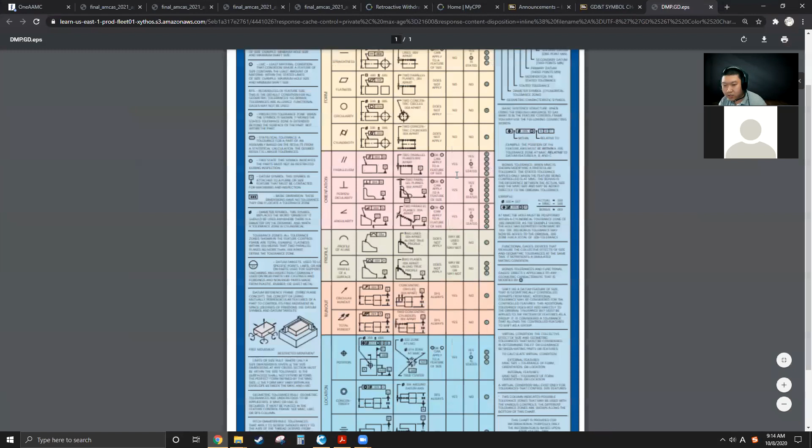All right, so I posted something under course documents last week called GD&T symbol chart, the geometric dimensioning and tolerancing symbol chart. It includes pretty much every GD&T symbol you're gonna use on your first project. Remember, I posted the project requirements two weeks ago. The project requires you to use at least 2 customized datums and at least 4 different types of GD&T symbols.

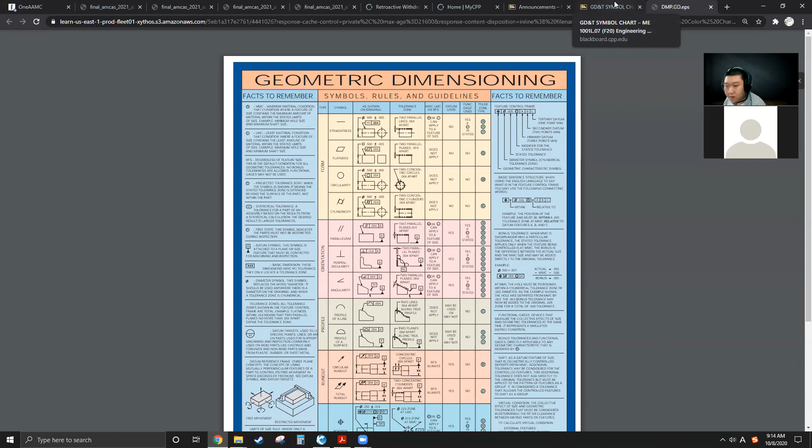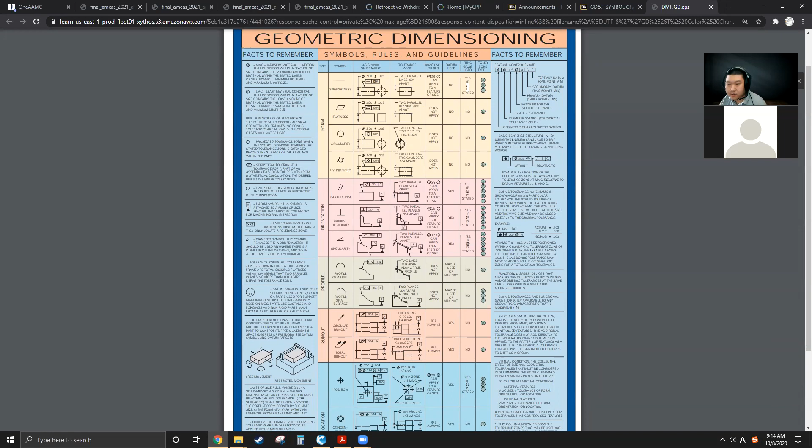So here you're looking at the GD&T symbols that you're going to use on your first project. You're going to pick at least 4 different ones and use them in the proper place. So let's go over this chart. Some of you might have read it, some might not. The first one is called straightness. The symbol is just a line. So straightness is shown as a line.

So you see right here, this box with the leader, this is your GD&T symbol and your tolerance value. A straightness of 4 thousandths of an inch pretty much means this edge, on this cylindrical object, kind of like a pillar, is going to have a straightness within 4 thousandths of an inch. Well, this is kind of weird to explain, because I never see straightness in any application.

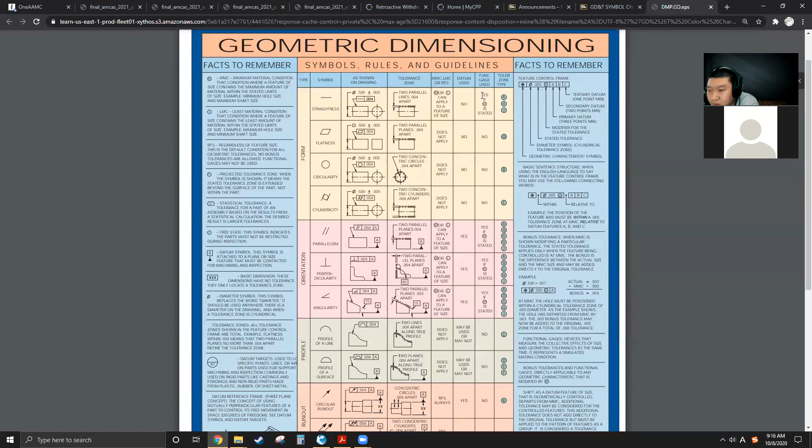So let's just read it together. So datum used, no, because you don't see any datum attached after this value. And the functional gauge used, yes, if M is stated. So what's M? M right here is maximum material condition. That condition where a feature of size contains the maximum amount of material within stated limits of size. Example, minimum hole size and the maximum shaft size. Yep. So if this one is stated as necessary for design, then it's yes.

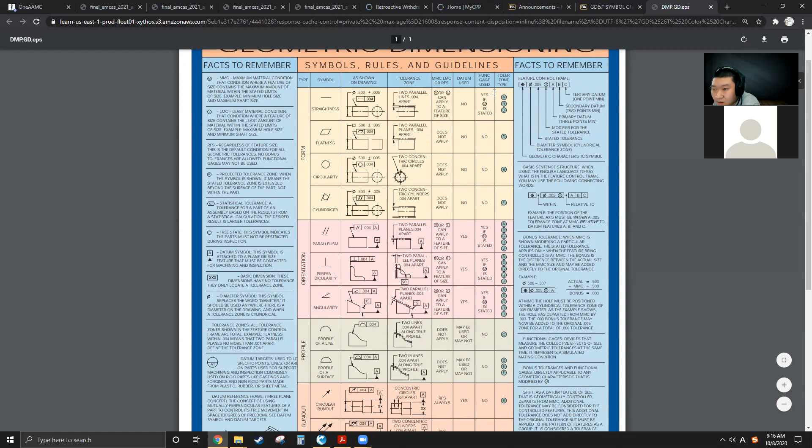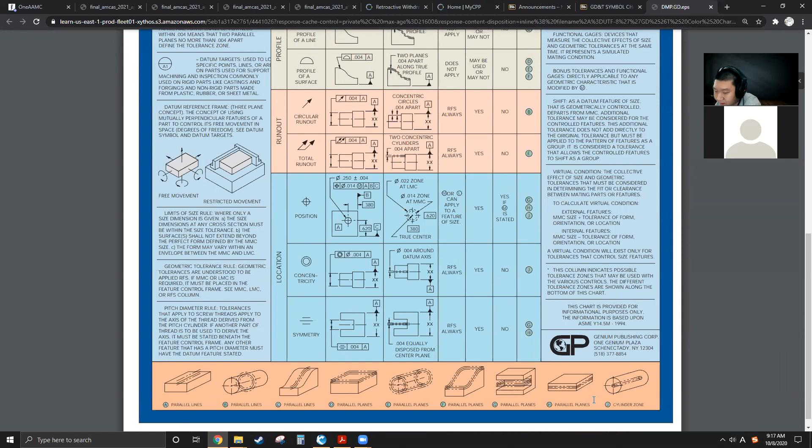And tolerance zone type, A, H, J. Where is A, H, J? Okay, A right here. All right, parallel lines. Yeah, definitely. Straightness dealing with line, right? And H, parallel planes. And a plane can have straightness as well because it's a 2D plane; when you look at it sideways, it's going to look like a line. And J, last one, cylinder zone. That's kind of confusing.

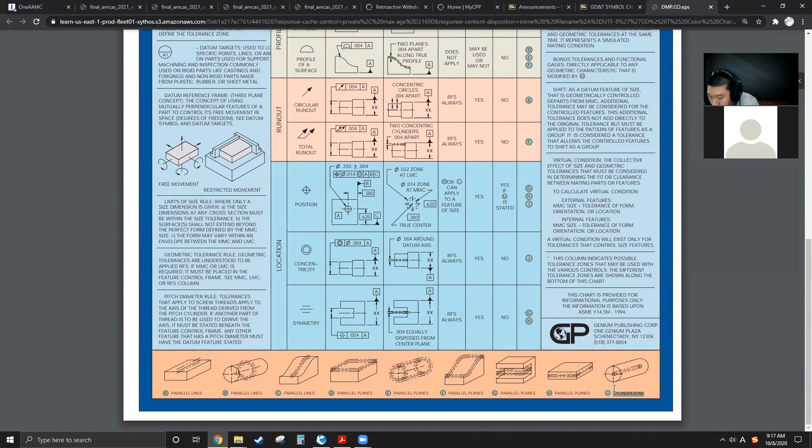All right, for cylinder zone, I don't know. Maybe it's just talking about the center axis, like the center line of the cylinder, or is it talking about a little bore? I don't know. It's kind of weird because straightness can be covered by a lot of different features. Like, for example, if you have total runout or total indicated runout, straightness can definitely be covered by this feature. So that's why I never see straightness in any industrial application.

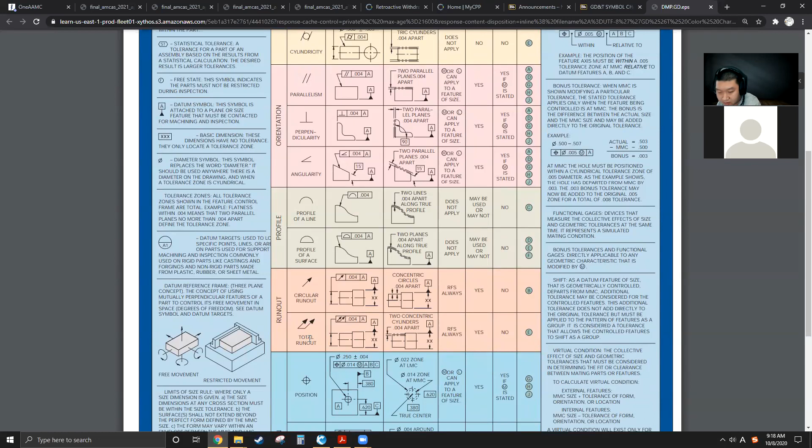Normally, if you have a cylindrical subject like this, and it has a bore or something to correlate with, or another bigger round cylinder, such as this one, you use total indicated runout, so you make sure that two edges of the outside surface of the cylinder are perfectly straight. Because if it's not straight, it will fail the total indicated runout inspection at QC. So I would say straightness probably won't be a very good example. But anyway, it's here. It has a purpose to be here, right?

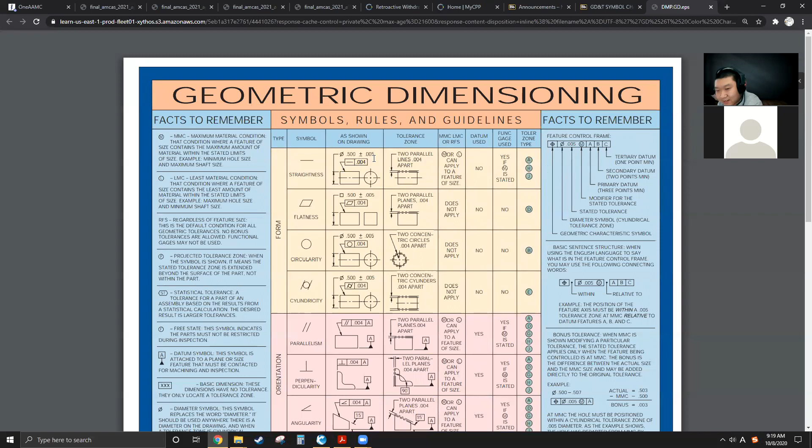And it doesn't even reference any datum. So if it doesn't reference any datum, that means this is pretty much just a reference by itself. You know what I'm talking about? Referencing a datum is kind of like a dimension. A dimension references one edge to another edge. So a dimension has two references. It's kind of like a line: you must have two dots, and connecting two dots gives you a line. But this one doesn't even reference anything. So if you want to use it, do some research to see what kind of application you'd use this in. But most likely this is really, really weak.

And flatness, no reference datum, but this one's kind of critical. I've seen this one a lot. For example, if you design a table or a bench, and the bench is going to take some load or some mechanism is placed on the top surface, your flatness would be very important. Because without flatness, the stuff you put on there can be imbalanced or rattling. That kind of stuff can damage your entire system, especially for natural frequency purposes.

So flatness and this value, 4 thousandths of an inch, is actually the industrial standard. If you work with an electric motor and your motor is going to be sitting on top of a plate or an adapter or anything, the top surface of the plate or adapter must have a flatness of 4 thousandths of an inch or even smaller. I have seen 2 thousandths of an inch, and that's really, really hard to machine and costs a lot. So flatness is definitely a pretty strong one, and people talk about it a lot.

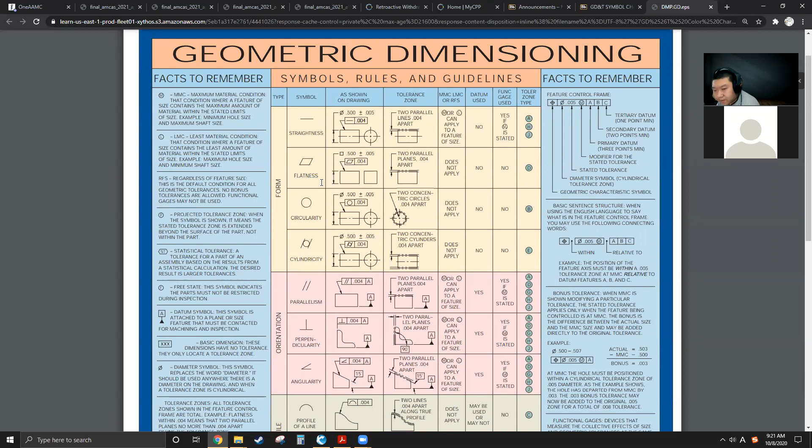Circularity and cylindricity, they're very similar. And also total indicated runout and concentricity; these four come from the same family. They're siblings. So circularity, you can see this one has a diameter of half an inch, plus minus 5 thou, and the circularity has a 4 thousandths tolerance. So that means two concentric circles cannot be more than 4 thousandths of an inch apart. Very straightforward. With two concentric circles, you want them as concentric as they can be, right? Because if one circle is off place, you'll be in very big trouble.

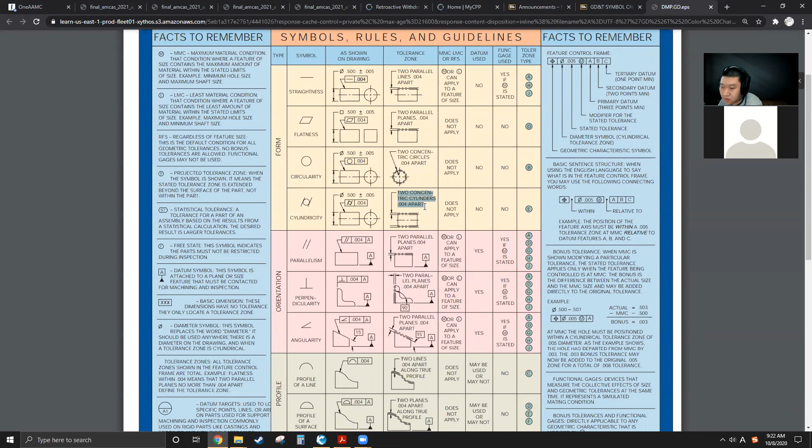And cylindricity, pretty much the same thing. I believe one is talking about two circles, and this one is talking about two cylinders. So very similar. Any questions about these top four? Let's go section by section. I want to go over one section, and if you have a question, let's talk about it more. And if you don't have a question, let's move on to the next section.

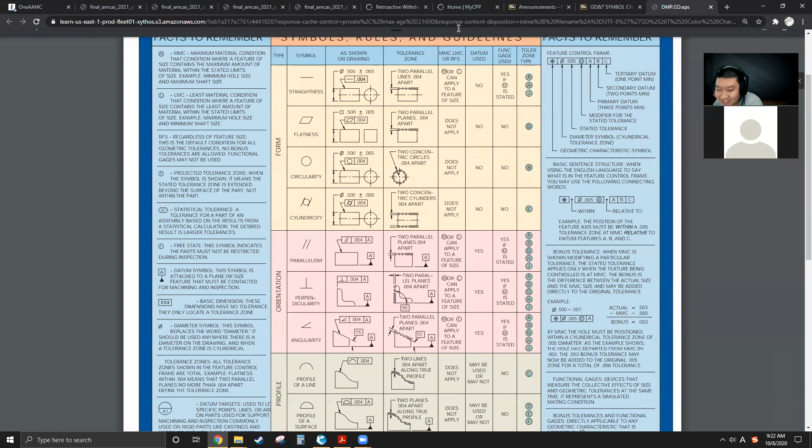Nothing? You guys still there? Yep, still here. All right.

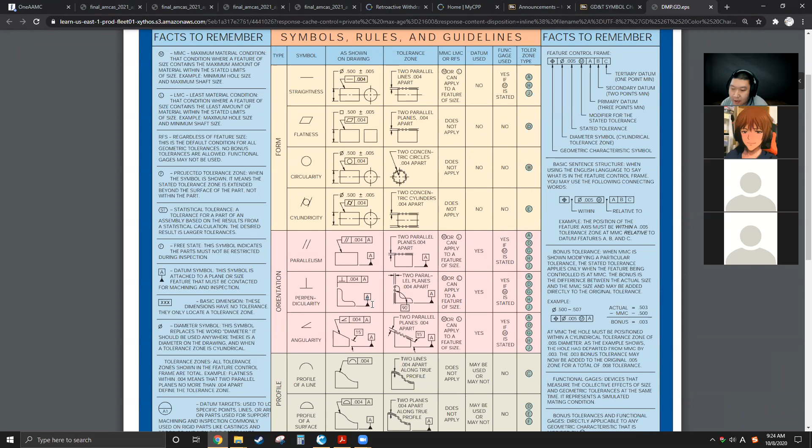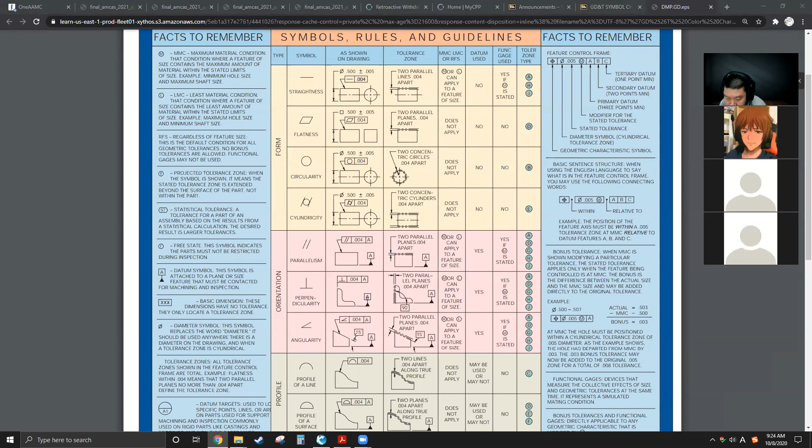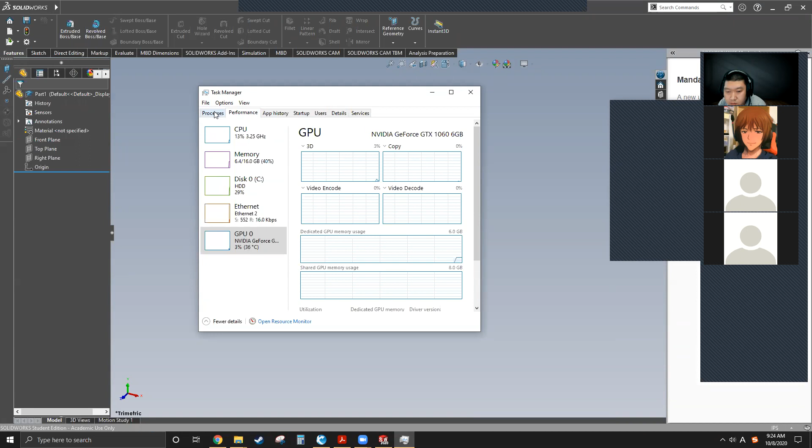Hold on one second. Let me bring up SolidWorks so I can do a quick part for you. Oh, that's fine. Why is it so slow?

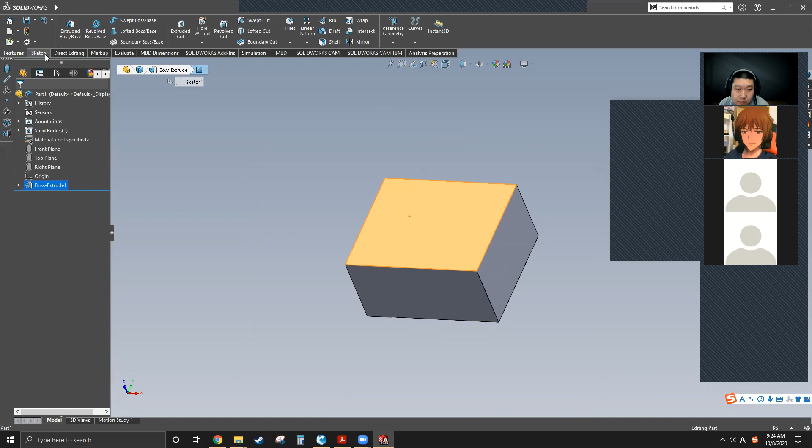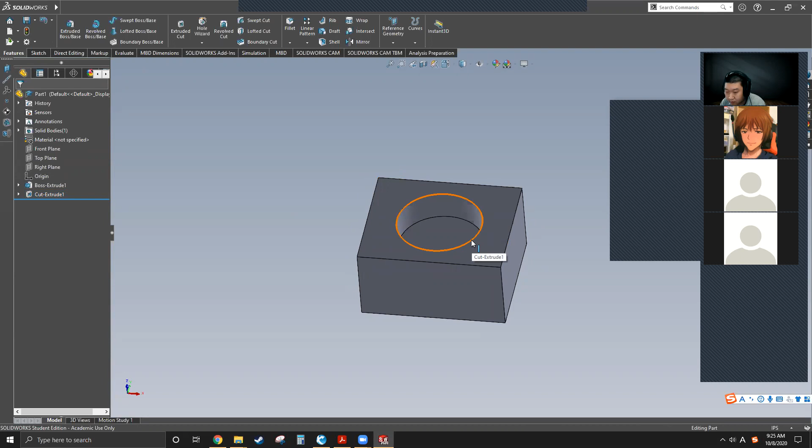All right, you have a block. For example, you want to mill two circles or two counterbores, and that's your first circle. Let's make a counterbore. Okay, so you have a counterbore right here, and let's do another circle. And you want them to be concentric, right? So pretty much you have a bore and a counterbore. These two circles are concentric, right?

And how can you make sure these two circles are as concentric as you're asked? Pretty much you can't. You tell the machinist, machine these two circles with origin at the same point. Machinists can understand it, but the machine doesn't. When you get into the manufacturing lab and start using the lathe or milling machine, they can't identify the origin of the circle. That's why you need to tell them how much tolerance you're going to take.

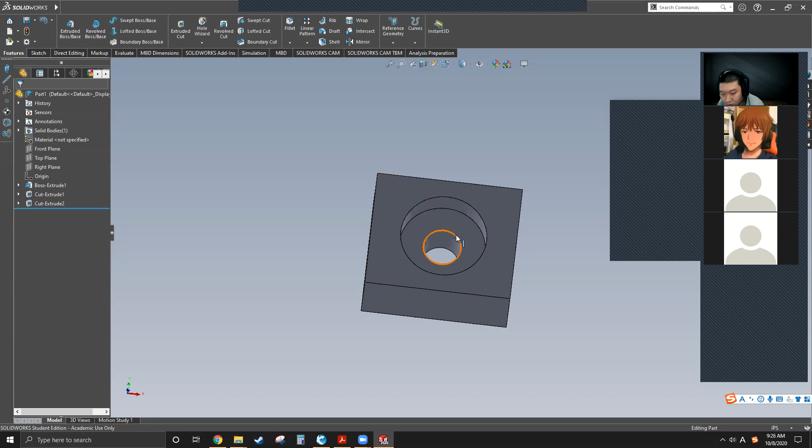Tolerance means kind of the risk, how much you're okay with for your part. You want this to be perfectly concentric? No way. Unless you're paying a lot of money for some high precision company using leading edge tools, maybe there's a possibility, but most likely it's not going to happen.

So you're going to set a tolerance saying, these two circles, if they're not concentric but the distance of the two origins is less than 4 thousandths of an inch, that would be acceptable. So the machinist will say, okay, that's doable, my tool is not that precise, but 4 thousandths of an inch should be enough. You know what I'm saying? Yeah, I get it. So that's when you use circularity.

Same with cylindricity. I believe this is just like a bushing. So two cylinders, right? One cylinder is the bushing, and another is a hollow cylindrical shape within your bore. So instead of two circles, circularity only controls this highlighted circle and this circle, and cylindricity controls this surface and this surface.

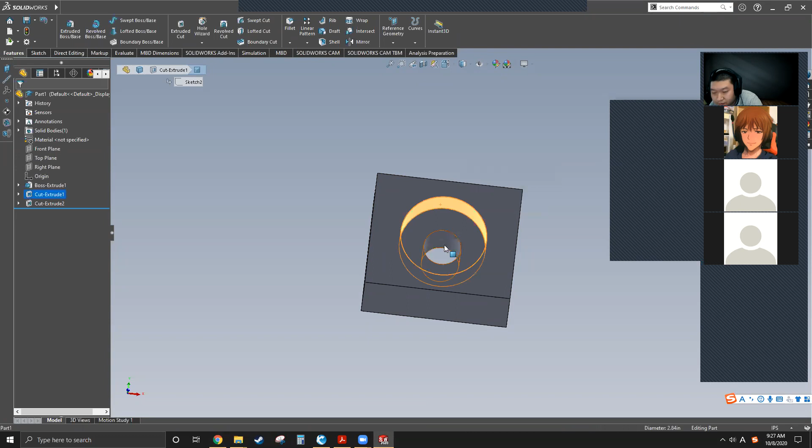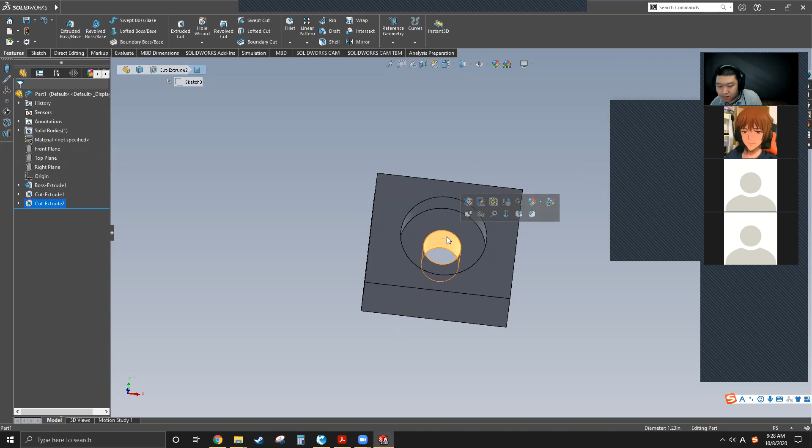So if you use circularity, they're just going to measure this circle and where the origin is, and compare with this circle's origin. When you use cylindricity, they're going to measure all the way through the surfaces, any spot on the surfaces, and compare with any spot on this surface. So the difference is like point to point versus surface to surface, kind of like 1D versus 2D.

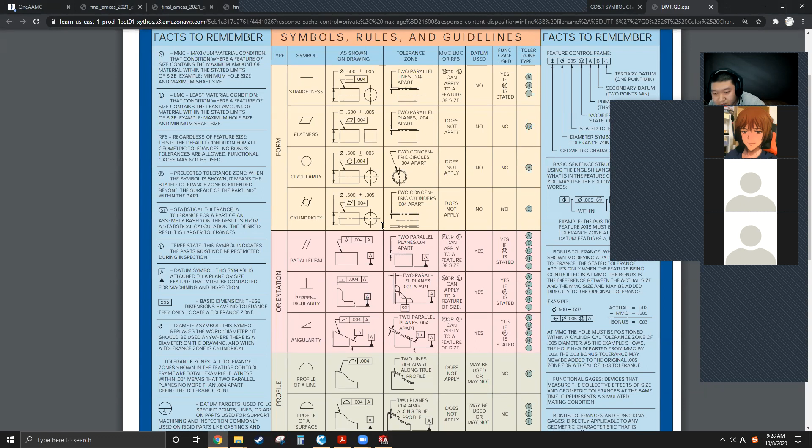All right, I'll move on. Oh, no problem. Anytime, man. You just need to ask.

Parallelism. Right now the datum starts kicking in. You can see it has a little box right next to the value. This is datum A, and it shows on this diagram with a little leader to this edge. That means datum A is this edge. Before we get into it, let me show you the definition of datum. I really can't remember the textbook definition.

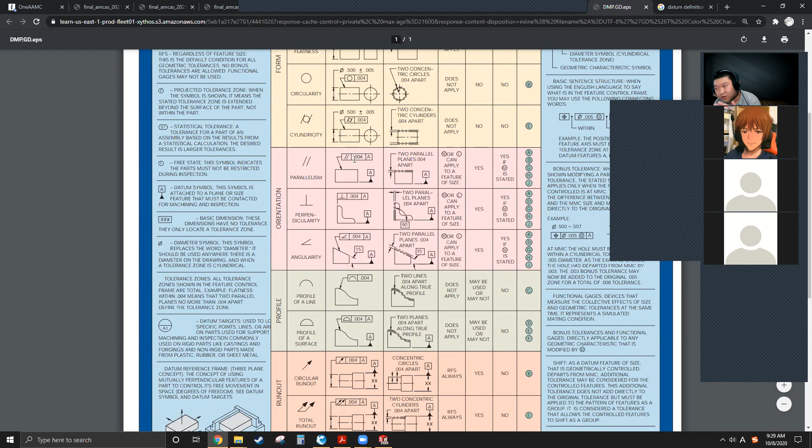A datum is a plane, a straight line or a point used as reference when processing a material or measuring the dimension of a target. Remember this definition, or remember it in your own language. So the datum in this case can be an edge. For this block, the datum is the bottom edge, and you want your top edge to be parallel with the bottom edge, and the difference for the two parallel lines cannot be more than 4 thousandths of an inch.

I hope that explains it. Okay, here it says it better. Two parallel planes, 4 thousandths of an inch apart. So your line cannot go over that plane. You see this very often, same as circularity and flatness.

Yes, yes. So I will show you later. Well, no, it won't automatically show up. You will need to manually input the symbol type and the tolerance value for your dimension.

And perpendicular, well, whatever, perpendicular. Perpendicular, same thing as parallelism, just this one is 90 degrees apart. So these two are very similar, but do different jobs. Angularity, I never used it. I never see anybody use it.

Anybody who still recalls what we did 2 weeks ago, making the weird pyramid with a lot of angles within that model, right? Kind of like a little pyramid, that kind of stuff, weird shape. But we never even defined any angle, right? Why? Because the model is fully defined by all the distances from this edge to that edge, from this point to that point, stuff like that. We don't need to define any angle. And if you forgot, just go back to YouTube to watch the lecture video again.

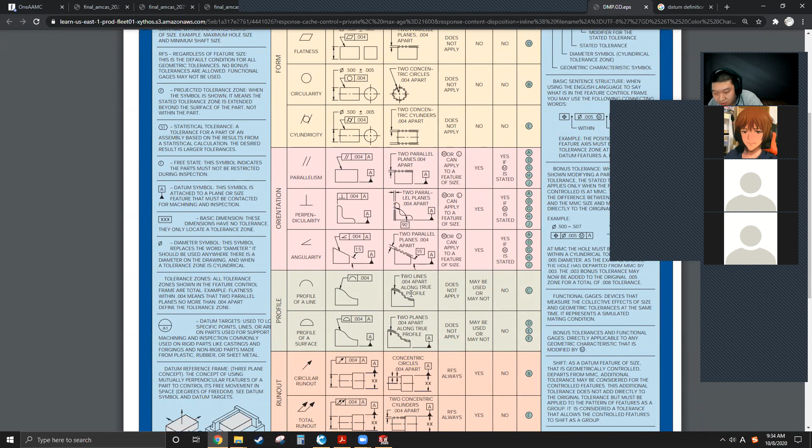So profile of a line and profile of a surface. I normally don't see this, but let's read it. Two lines, this amount apart, along the true profile. So kind of like a curvy straightness, or is it like a curvy parallelism, right? So the profile is regulated by two boundaries, the first boundary and second boundary, which are the dashed lines right here, and they cannot be more than 4 thousandths apart.

And this one for the surface, pretty much profile of a line versus profile of a surface is very similar to circularity versus cylindricity. One is talking about a line, one is talking about the entire surface. And its own characteristic is very similar to parallelism.

Okay, circular runout and total runout. So total runout pretty much covers circular runout. So this is kind of like parent and child. So if your company doesn't want to do the entire tracking band, or wants to reduce the cost for manufacturing and QC, they probably do circular runout. But this one only regulates, I believe, one side, right? Concentric circle, this apart, and this one is two concentric cylinders, this apart. Yep, so this is going to control one side, and this controls both sides.

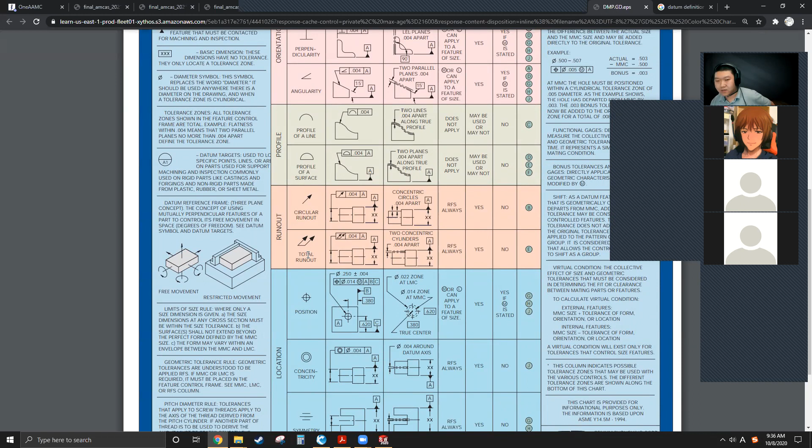And total runout, very powerful and very expensive. This is very strictly used in any rotating components. So anything that's going to rotate definitely will have a total indicated runout inside its bore or outside its shaft or on both. So if you're making your project a rotating component, such as a gear train, anything that rotates, you can't miss this one.

Any questions about the second part before we move to the final part?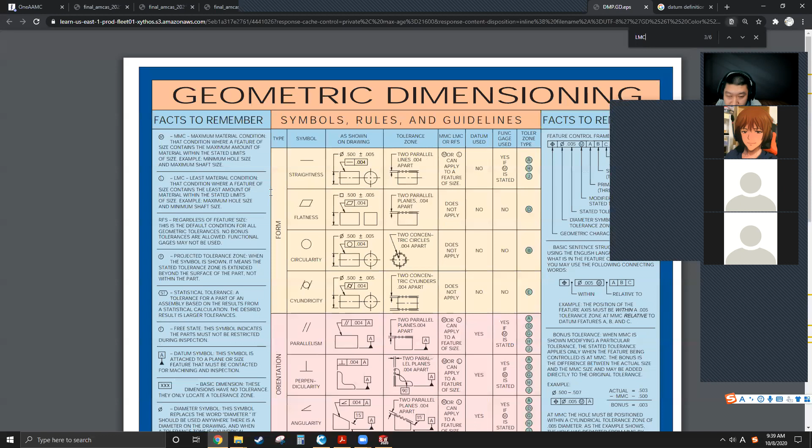Okay, limit of size rule, only a size dimension, beyond the envelope. So MMC is maximum material condition. Okay, least material condition. Okay, so one is maximum, one is least. All right, where are we? Okay, right here.

So this one is this big at the least material condition, and 14 thousandths of an inch zone at maximum material condition, and true center. Wow, this one pretty much explains nothing. Okay, 4 thousandths, 8 thousandths. Okay, I get it. So 14 thousandths of an inch, right? And this hole is a quarter-inch hole that has a plus minus 4 thou.

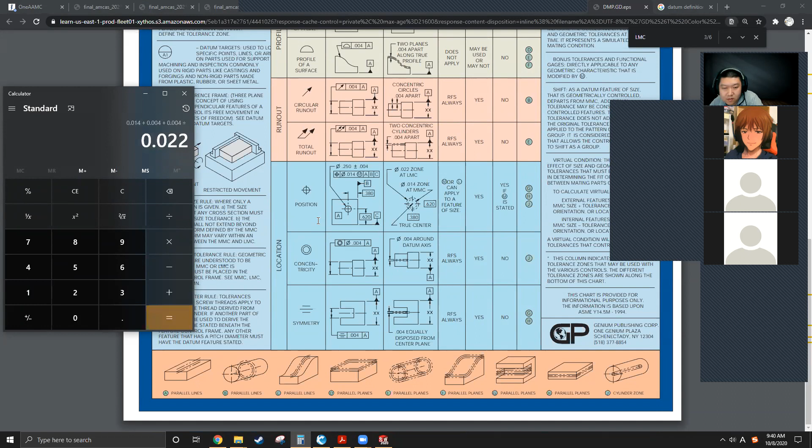So the hole's location can be off by 14 thou plus 4 thou plus 4 thou. So that's 22 thousandths for the least material condition. How to say that? So is this much off? Anyway, so pretty much this 0.62 from datum C can go above this much or less than this much.

Let's get a notepad. Yeah. So this 0.620 dimension, you can see from the center of the hole to the reference C, can go plus or minus this much. And that's your least material condition. Okay. And your max material condition is pretty much the same dimension and plus or minus this one, because you can't go smaller than this. Is this making sense? And the same rule applies to this 0.38.

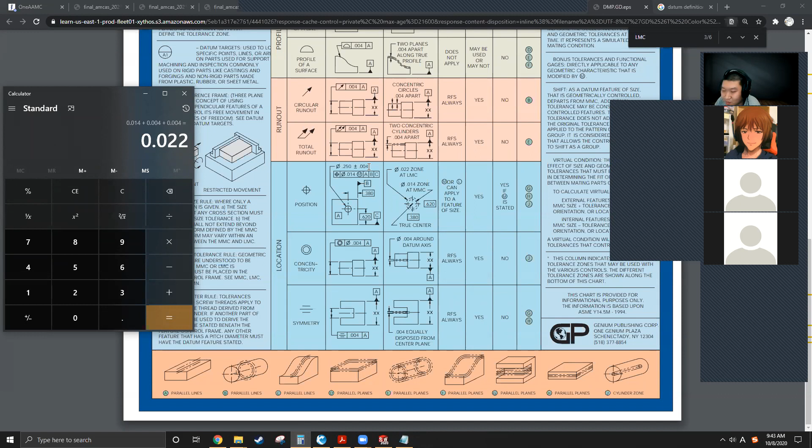Okay, so this number is added up from your tolerance value plus the hole's tolerance twice, because your hole has a tolerance and this dimension also has a tolerance. This is sort of making sense. Yeah, it's kind of a weird way to express it.

Yeah, after you get to your manufacturing lab, when you start milling holes or tapping holes, you'll understand that really easily, because the machine is sitting right there, and how you adjust the machine, what kind of math you're going to do, and input the value to locate the die. Yeah, they call it milling the die, or something like that, or the tap, and then you'll fully understand it. But for now, just know this one is really necessary for fastener hole stuff.

Concentricity. This one is very similar to runout, but is less strict, because this one is just talking about the datum axis and the outer surface, OD. Yeah, talking about the OD and the center datum. So you see, this one has a very similar diagram as the parallelism. Unlike this one, which is really strict about its outside surfaces. See?

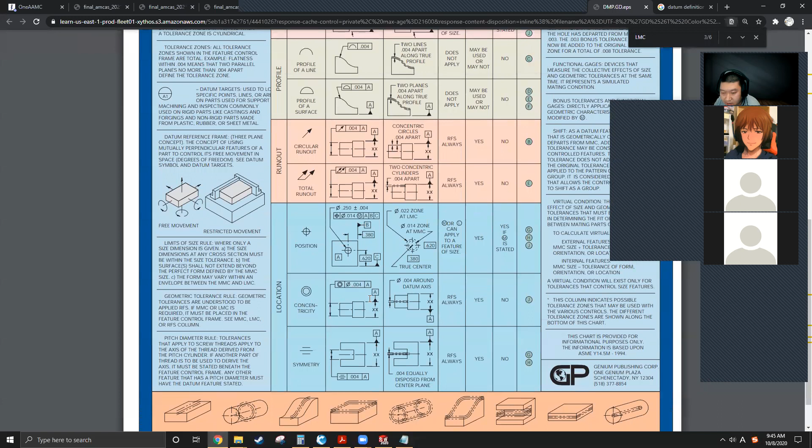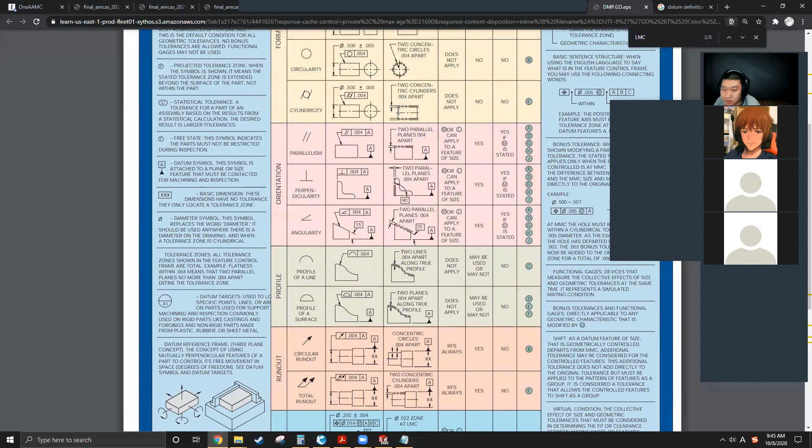So I'll say concentricity pretty much has the same power as cylindricity, but deals with one datum. This one doesn't have a datum, right? Yeah, this one doesn't have a datum. This one's controlling all the outside, like two surfaces, but this one is controlling one surface with the datum. And the datum you can set as the center axis, or you can set something else.

And symmetry, never seen it. I don't even know why it exists. Maybe some industry uses this a lot. I don't know. Because normally it's just easier to identify all parts, even though it's perfectly symmetric. Like your part is perfectly symmetric, but it's just easier to define the whole thing. And if you put symmetry right here, it might confuse somebody.

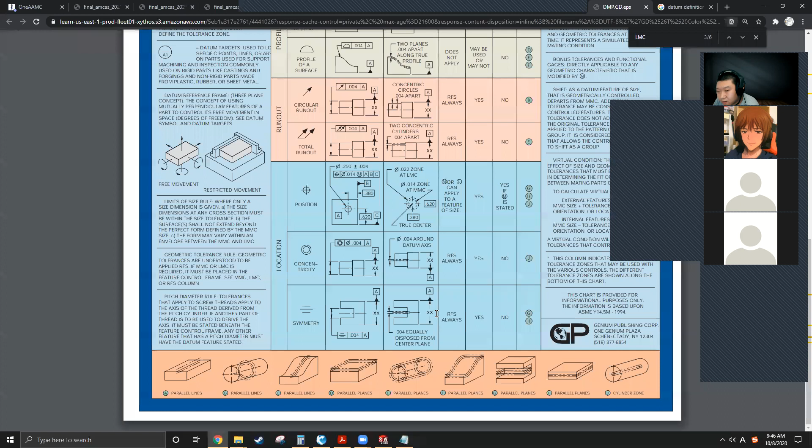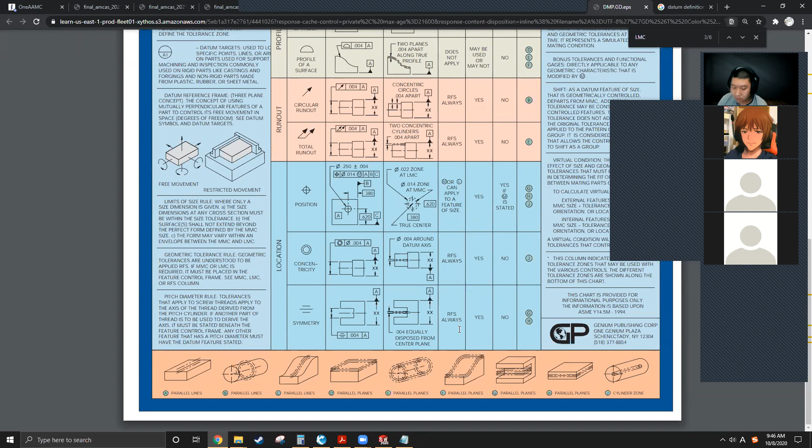So I'll say this one is similar to straightness. If you want to use it, you've got to do some research. But for all kinds of drawings that I have seen, I've never seen this. Okay. Any questions? No, nothing? Okay. Let's talk about what you guys care about the most, this project, right?

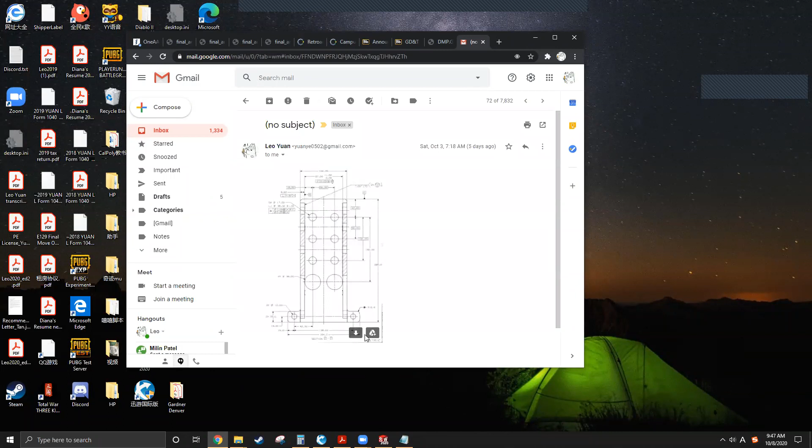All right, here we go. All right, everyone can see this one okay? Yes. Hello? Can you not hear us? Just Jacob alone. This is about your first project, guys. Yeah, I can't hear you. What's going on? Did I mute something? Yeah, I can't hear you guys. Can you hear me? So weird. Can you try to speak something again? Hello, testing. Can you hear me? Yeah, I can hear you guys. Okay, sorry, so dumb. My headphone has a controller by itself, and it has so many different modes. I turned off one of the modes, and it just became entirely muted. Okay, I feel much better now.

Yeah, so look at this drawing. This is my expectation for project 1. You don't have to make it as complicated as this one, but the way it's dimensioned, the dimensions you use, the datums it labeled, and the GD&T symbols are my expectation. Don't worry about the welding. This is the welding symbol. It's just there because I had to take the entire shot, so ignore this.

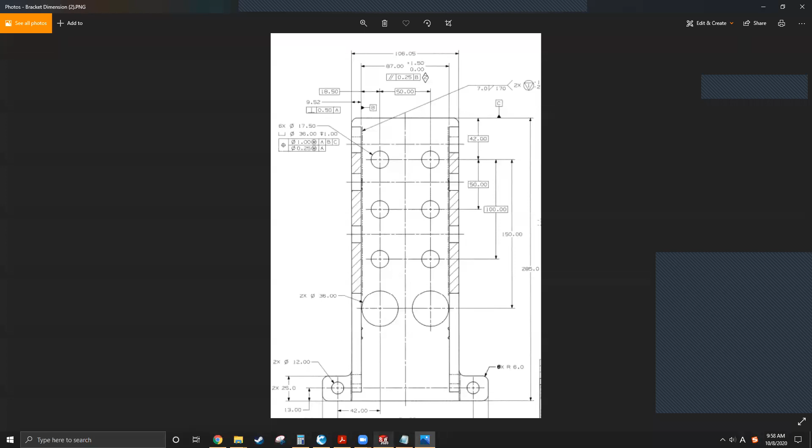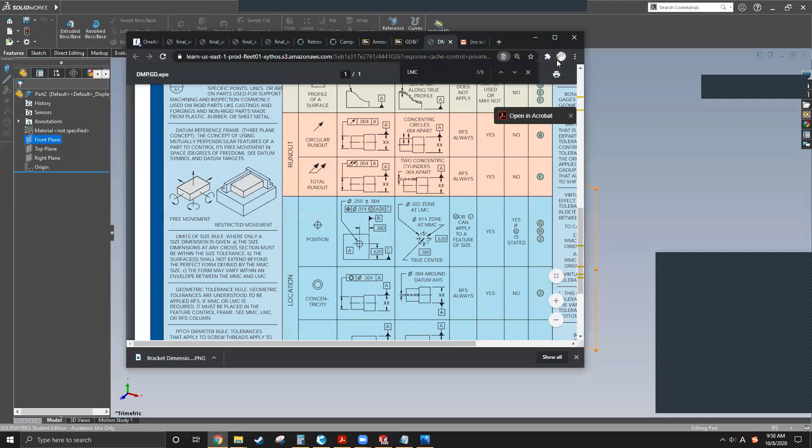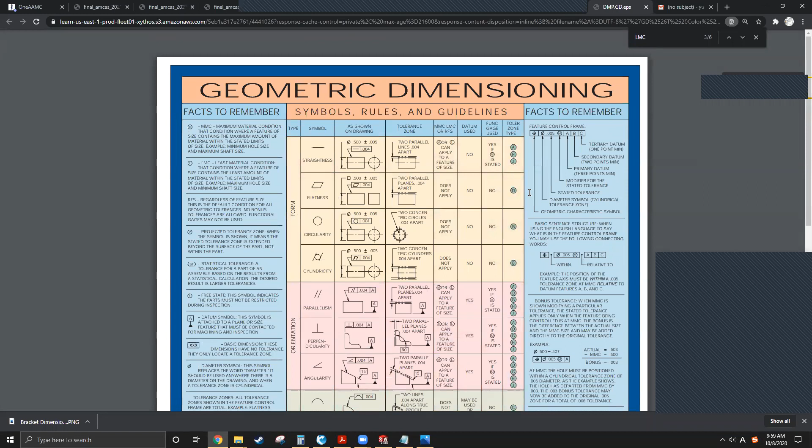Okay, so probably a lot of you guys are gonna have a question: what kind of part should I create to include 4 different GD&T symbols, right? Because all 4 GD&T symbols seem to have so many different jobs, right? How can you link, for example, circularity with position, or concentricity with flatness, something like that? I just want to show you guys a very brief example, and don't use this for your first project because it's not good. It's too easy.

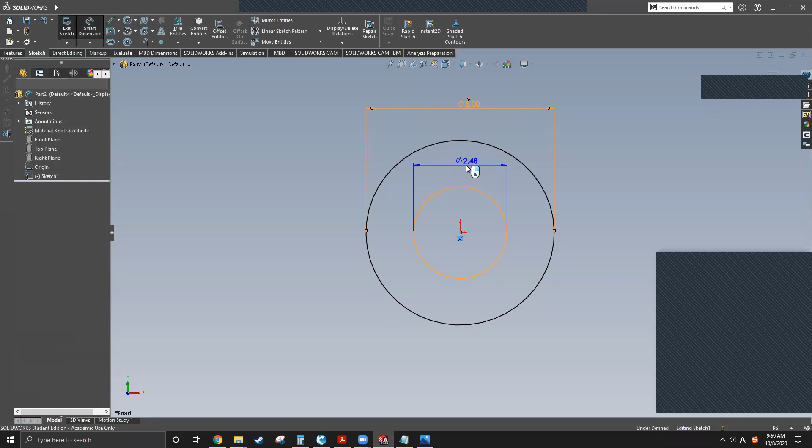So let's make 1 concentric circle, 2 concentric circles. And let's make another little hole, just wherever.

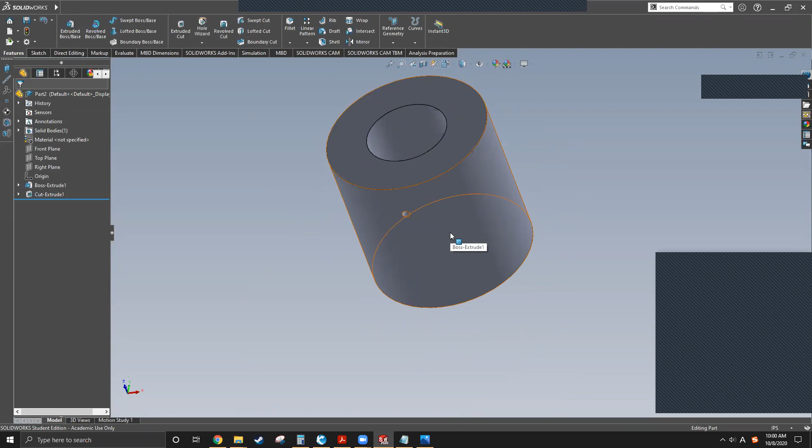All right, so this one looks like a sleeve, and this little hole I just made can be a set screw hole. You need to have a set screw to secure the sleeve, and this sleeve is going to be on a rotating shaft. So for a simple part like this, how many different GD&Ts can we use if we really want to make this part perfect?

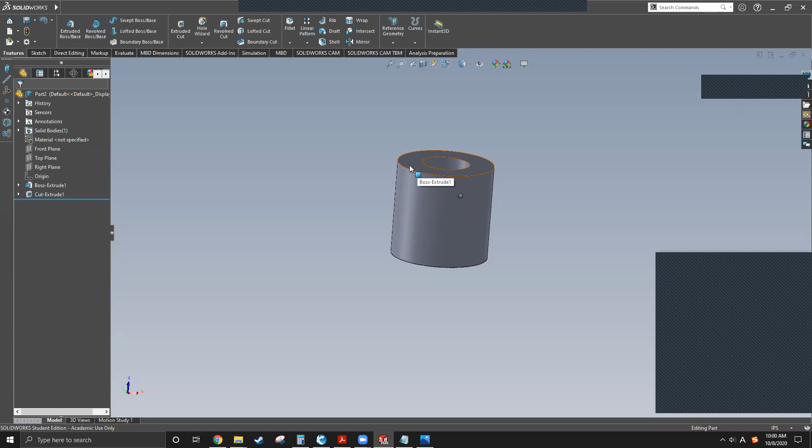So for example, this cross section, pretty much the top part of the sleeve, we can use flatness, even though we don't have to, and nobody in industry really cares about this surface. Pretty much it's because no normal load is going to be exerted on the surface. So nobody is going to care about the flatness, but we can if we really want to, because we're just doing projects, right? So flatness can be on the surface, that's 1.

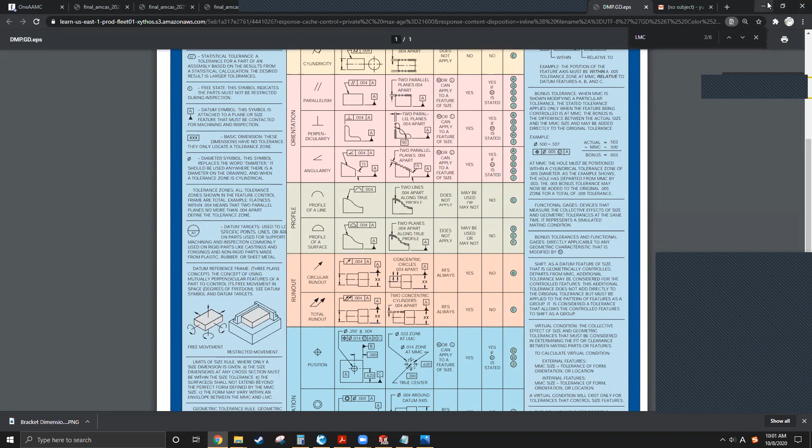And here we have a bore that's going to connect with the shaft. Even though this one is not going to rotate, your shaft will definitely be rotating, right? So you want to put total indicated runout, which is this one. The total runout, you can do that, even though it's not necessary. Your engineer won't say, sorry, sir, your design is not feasible. They will just say, oh, you're such an idiot, it's going to cost so much on some unnecessary machining. So you can definitely do that. So that's 2, flatness and total runout.

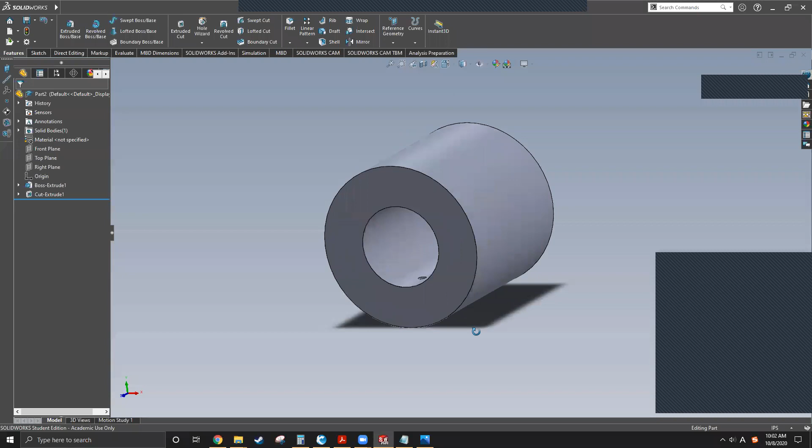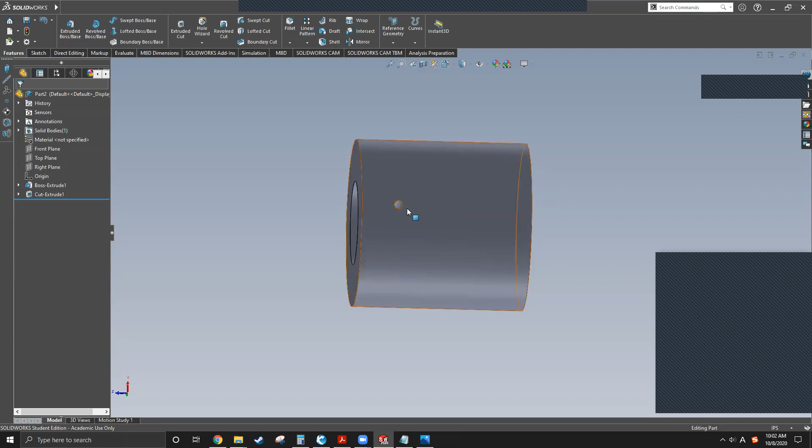And the third one, what else can we put on here? This is the set screw hole. So it's going to be threaded, because all set screws pretty much are threaded. I didn't put the cosmetic thread here, but you should. I showed you guys how to do cosmetic threads 2 weeks ago. Put the cosmetic thread here, and you can use positioning. And the positioning is going to reference the center axis.

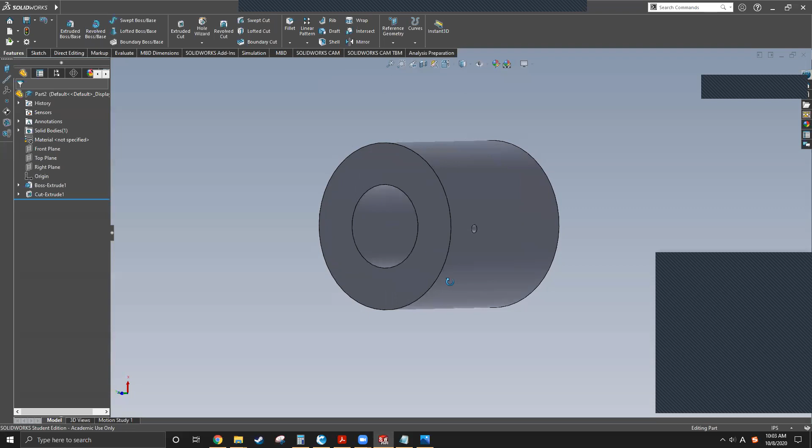Okay, let's view it this way. So the positioning is going to reference the center axis and this side edge, and the top edge, which would be like a tangent plane. So that's your A, your B, and your C. Okay, so 3 GD&Ts we have used: flatness, total runout and positioning. And what will be the next one? Let's check.

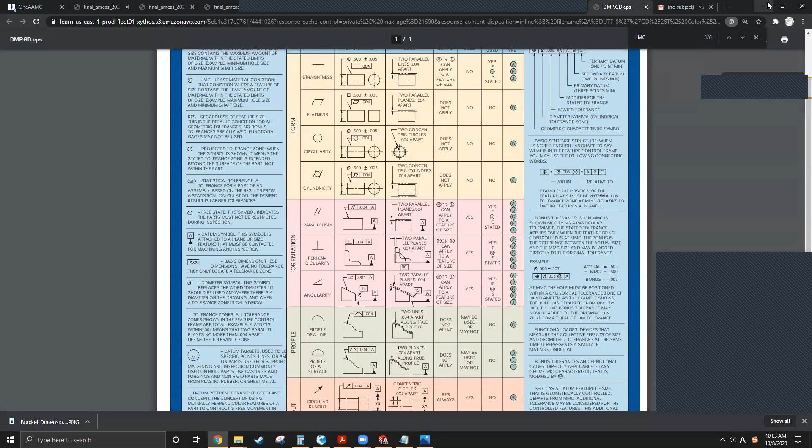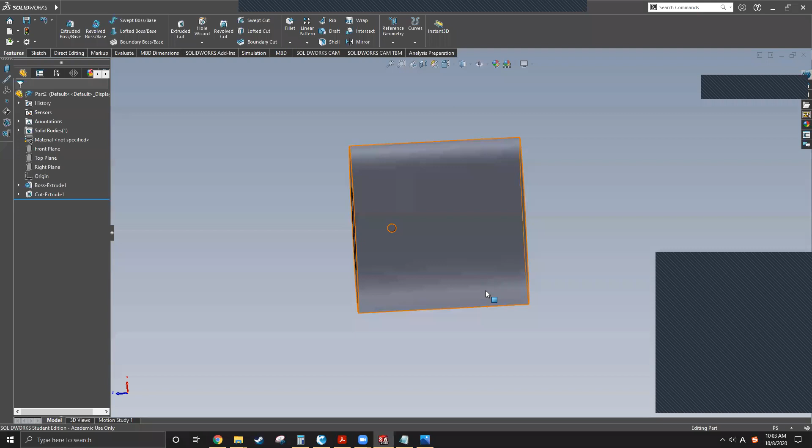Circularity, right? So your runout is controlling the contact surface of the bore with the shaft, and your circularity is going to control the entire outer surface of your sleeve. So you're going to put the circularity respecting this edge and the bottom edge. So one very simple part, and if necessary, you can put 4 different GD&Ts. Does that make sense?

Yes. Okay, great. Thank you. Well, don't use this as your first project. This is just a very easy demonstration, and I hope you guys can use your creativity and imagination to make all your GD&Ts feasible and reasonable. So very similar to the drawing I just showed you, this one used 3 different ones, and you can always add a 4th one, like respecting from here to here. So 3 is the minimum? No, 4 is the minimum. You need to use at least 4 different ones. Okay.

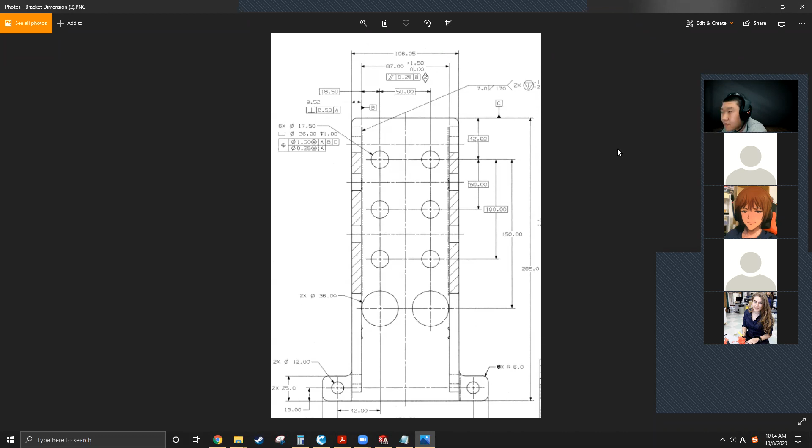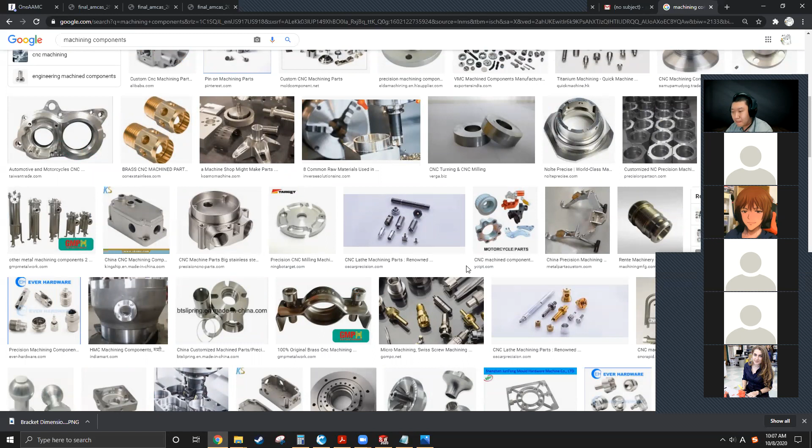Wow. Nice job, guys. Thank you guys so much. Yeah, it kind of surprised me. Still, half of the class is still paying attention.

Okay. So, any questions so far? I'm about to end here. Any question about homework, about project, about what I just showed you, ask right now. And if you have no questions, you're free to go. It's due at midnight of November 1st. Is the homework from last week the same for this week, or is there different homework this week? It's different. Homework 3 is different than homework 2, right? Yeah. Okay. And I wrote the instructions with homework 3. I believe you can see it from Blackboard, right?

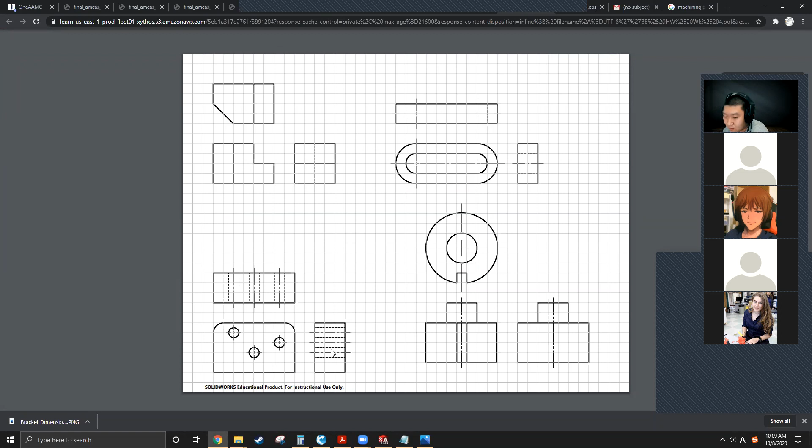Okay, anyway. So for homework 3, you can see those are projections. What you did for homework 2 is I gave you models, you guys made projections, right? This is reverse. You have projections, you need to make models. Oh, is that the announcement? Okay, thank you so much. I forgot what I did. Homework 3: please create 4 models based on their projection drawings and submit the SolidWorks screenshot of the isometric view of each model to Blackboard. Windows has a built-in snipping tool. Use the snipping tool, take a screenshot, save it in a Word doc or whatever, and then submit it into Blackboard.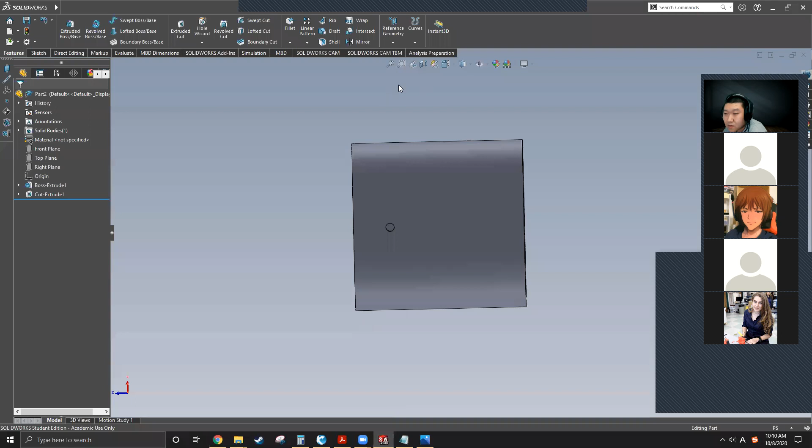So is the isometric view the view that shows an angle of the top, the side, and the front? If you look at my screen, this is the isometric view, and if you click on it, here we go, isometric view. Okay. All right. Cool, thanks. So it's one of the default views, no settings involved with it.

Alrighty, guys. Is GD a tolerance? What do you mean? GD&T means geometric dimensioning and tolerancing. Like on the drawing. Threads? Threads, no, you don't tolerance threads. You tolerance the hole position. For the threads, you use standard threads. You see those ISO threads or UNC threads, you just define the size of the hole, and they're going to automatically produce the threads.

Can you rephrase your question, Joseph? I don't get it. What do you mean? Is GD a tolerance like on the drawing? What's GD? Oh, for those of you who don't have any questions, you're free to go. Enjoy your night.

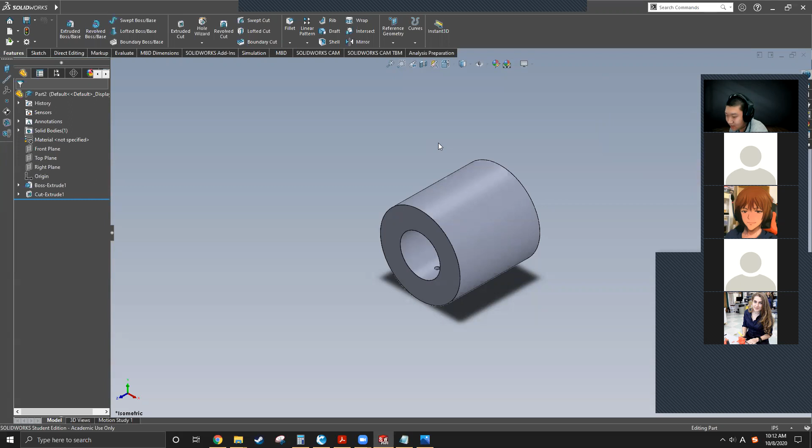Grab some dinner. The box dimension is called a basic dimension, that's completely different. That's not a tolerance. That's a basic dimension, and in Wikipedia, you can see here, a basic dimension is a theoretically exact dimension. It's a theoretical value. So it's a type of dimension. It's nothing to do with tolerance. It's not controlled by tolerance. Any more questions?

Professor, I have a question about the homework, if you don't mind. Sure. Which one? The homework that is due tonight, I've done all the pictures and I was checking them with the solutions you posted. I think I'm doing number 5 wrong, not sure. I thought I was doing it right, but then I checked it again and it was not the same as the solution you posted. I don't know if you have the picture open right now, but if you look at number 5, it has a stair kind of shape on the left side. Yes.

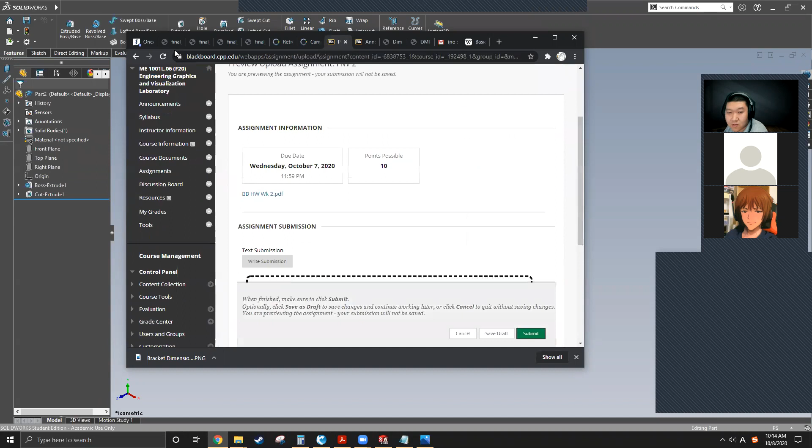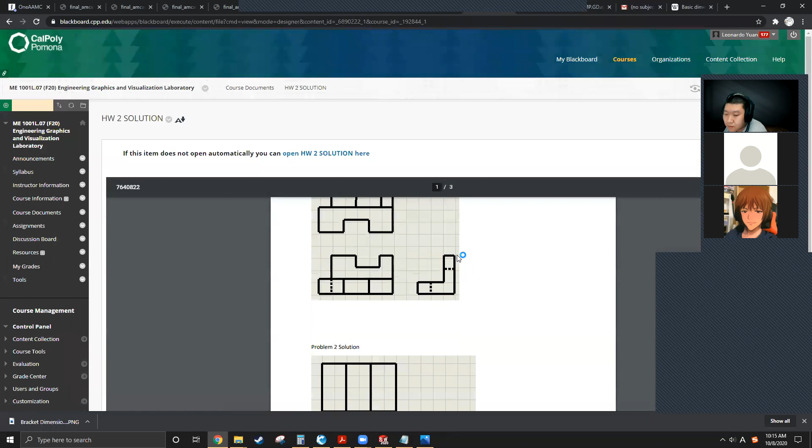So what about the second square? So if you look at the solution, looking from the top view, right? I assumed it should be like a stairway kind of shape from the left to the right, from the second row, second column to the first row, second column. You know what I mean? Because when you look at the picture, it's like a straight line instead on the solution. So I was not sure. This is the top view, I think. Right? That's what you mean? Yeah. Oh, it does.

I see. So the solution is wrong. Oh, okay. I'm sorry about that. No, it's good. I was just afraid to submit it because I was like, oh, I did something wrong then, but okay. Didn't I also email you about that too? Yes, you have. Yeah, but I wasn't looking too deep because I was at work. No, it's very confusing. Yeah, no problem.

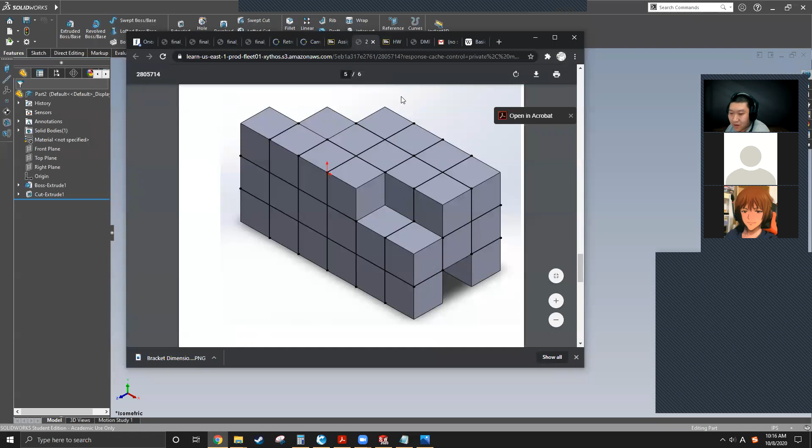Actually, yeah, this one is super wrong. It has to have the saw teeth shape right here, but this one doesn't have it. So apparently, whoever made this solution is very incompetent. All right. I really appreciate you pointing it out, and actually, the way I grade the homework is very lenient. So as long as you didn't draw some Mickey Mouse, I'm gonna give you full credit. The homework just helps you practice with SolidWorks.

Yeah, if you'd be very offended, I mean, you know what I'm talking about, right? Yeah. I'm not that old, so I'm kind of easy to be offended. Just kidding. All right. Thank you. So definitely, good catch. Alrighty. Anybody else?

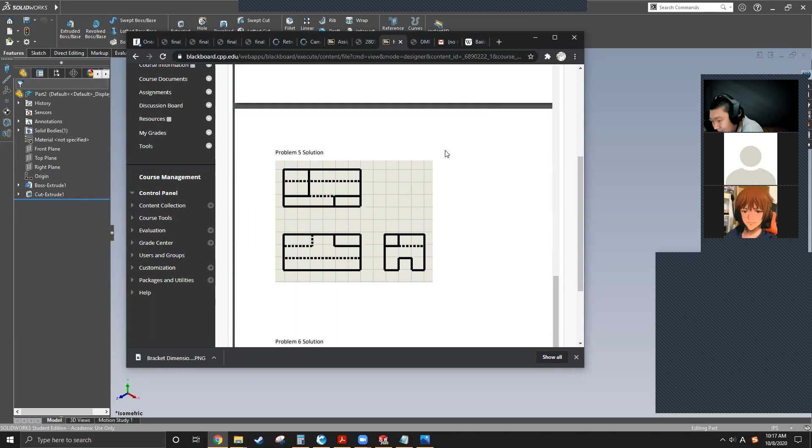Supposed to do that on paper? Yeah, so you have two options. One is hand draw on paper, and another one is do it by SolidWorks, the harder way. So up to you. I'm pretty good with hand drawing on paper, but if you really want to spend time with SolidWorks and practice yourself, do it by SolidWorks. I encourage you to do that as well.

Man, you better start doing it. It's due tonight, right? I forgot what the due day is, but homework now is 30%, if you allow me to remind you. And I would say homework is really like a free 30%. As long as you do it and I see you try it, I'll give you full credit.

Okay, so this week, you need to start selecting the component that you're gonna draw. So before you come to class next week, you're supposed to have a very explicit idea about what you're gonna make the drawing of. So you can start the project after next lecture, because next lecture I'm gonna show you guys how to make the drawing like what I showed you in the picture. So pretty much it's like doing an example for you.